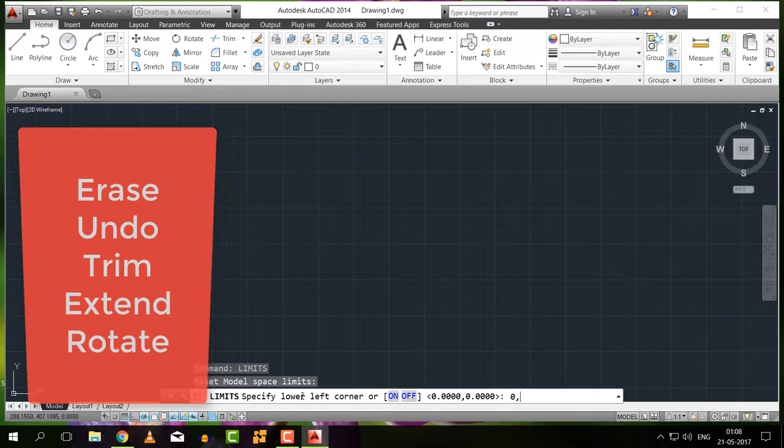Today we're going to see about erase, undo, trim, extend and rotate.

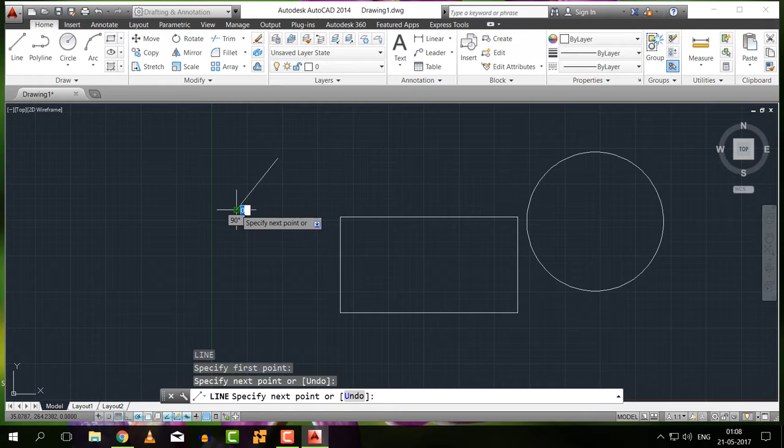For erase, the command is E, enter, select the object and enter. The object will be deleted. So it is very useful when you just draw multiple sets of diagrams and want to erase a particular type of diagram.

And U enter is undo. Just enter it, and it will undo your actions.

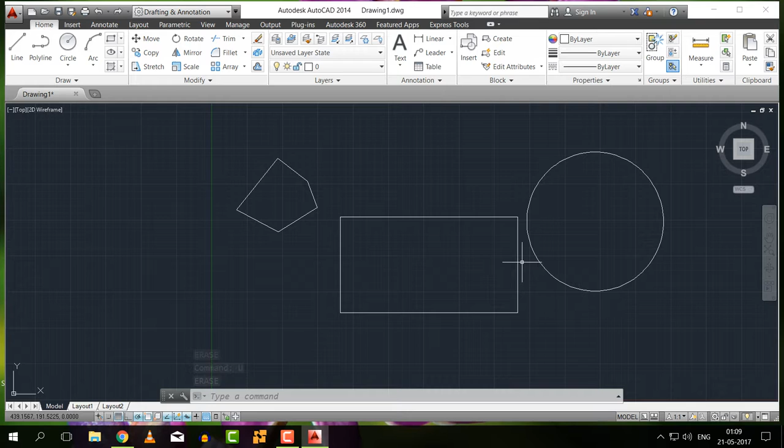Next we're going to see the trim options here. Trim is very essential in AutoCAD and a very useful command. Let me draw a layout for these trim options. This example will be perfect for all the trim options.

For trim, the command is TR, double enter. We have fence, crossing, project, edge, erase and undo. First we see about fence.

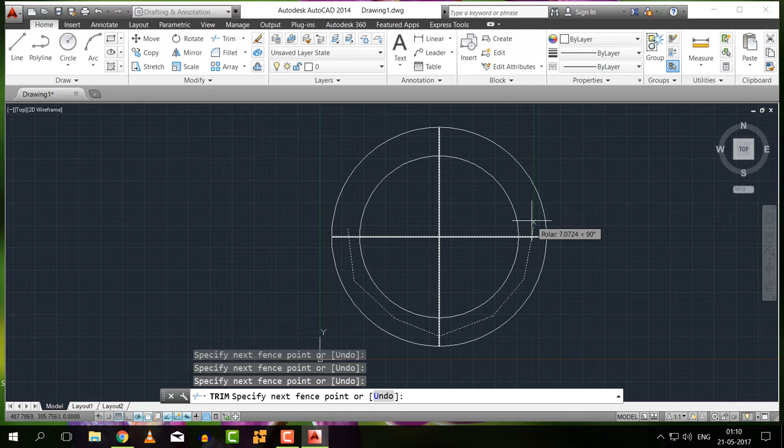Fence is nothing but a crossing of anything. If you just draw anything in a crossing manner with a closed or open loop, it will be trimmed.

Next is crossing, and if it has any edge, it will be trimmed. If we just use the trim command as TR double enter, it will normally be used as a crossing trim option only.

Next is project. Project is nothing but a trim option based on our views, and it is similar to crossing. It needs something opposite to each other, like a line.

For example, I'm drawing a small part of line and using project. We enter, then it asks UCS, view, or something else. UCS is nothing but the user coordinate system, which is the coordinate system I've set. Based on that, it will be trimmed.

You can trim this diagram anywhere because opposite we have lots of edges, so it will be easy.

Next option is edge. We have extend or no extend. First we see extend. Extend means it will be trimmed to the edge of the extended line.

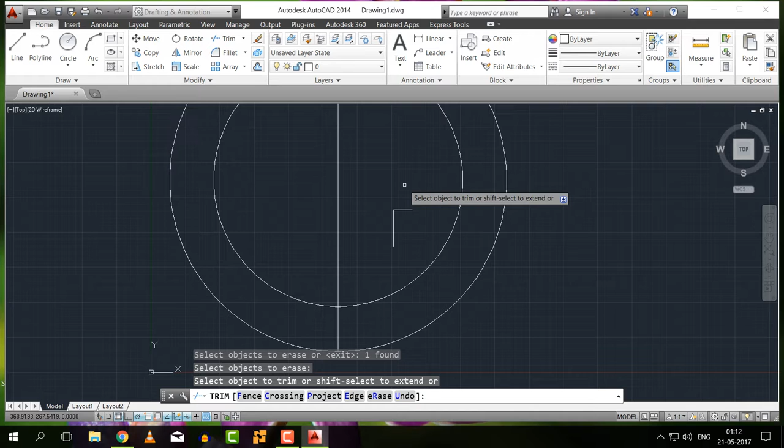So erase is normal erase as we saw before, and undo is normal undo as we saw before. E enter and U enter are the same, but vice versa it should work in the trim option.

Next we're going to see the extend command. For extend, the command is EX, double enter, and the options here are the same.

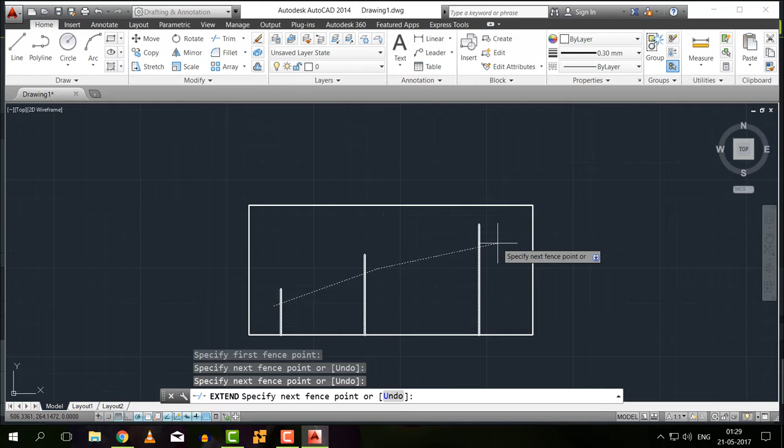Fence, just crossing a line, then click enter, it will close to the next line. Next is crossing - similar, if you use EX double enter, it will normally work as a crossing command. Just click the edge of the open loop, and it will become a closed loop.

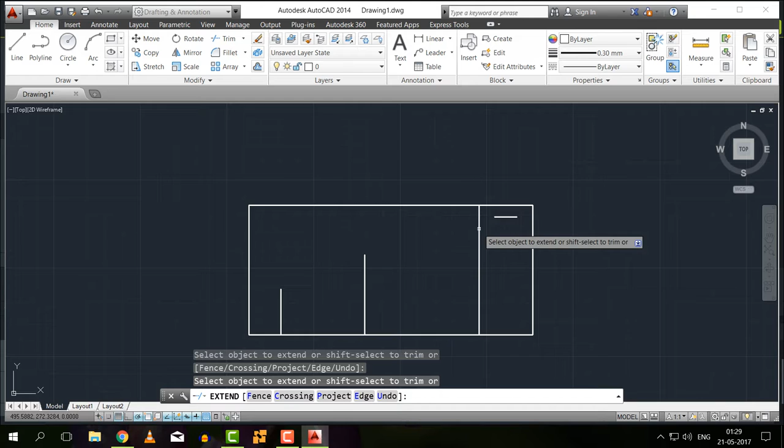Next we're going to see the edge option. It's also similar - we have extend and no extend options. Edge no extend means it will go fully up to the closed loop, while extend means it will only go up to the edge of the line.

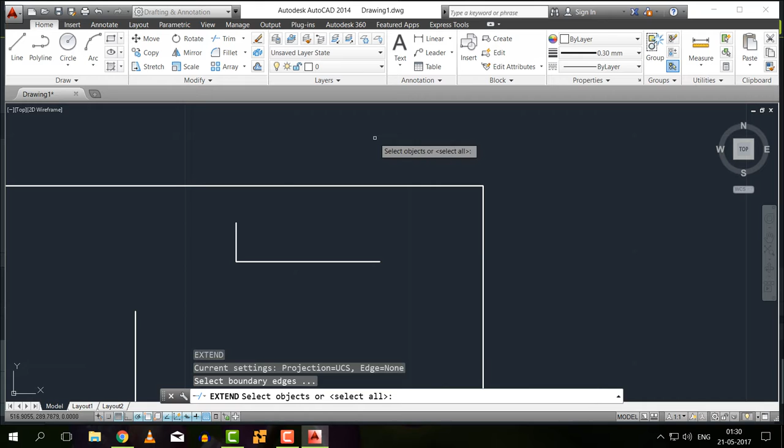You can see here right now it will extend to that particular line.

So next we're going to talk about the rotate option. It is a very essential AutoCAD command. This is a simple command and it will be very useful when you're drawing anything in AutoCAD.

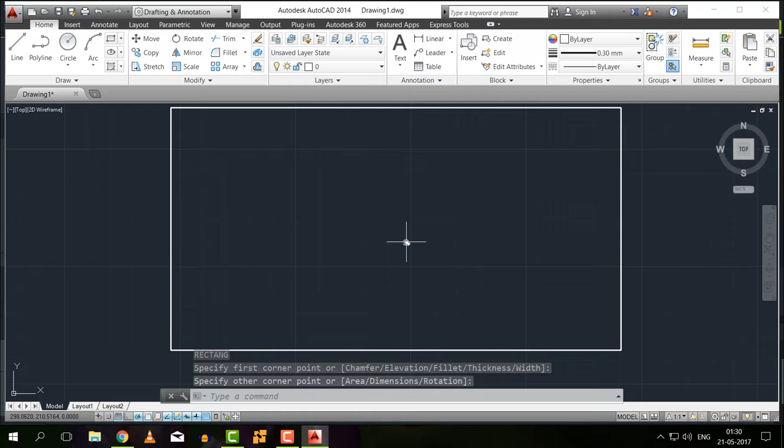For rotate, the command is RO, enter, and it will ask you to select the object, then it will ask you to specify the base point - any point based on which we're going to rotate.

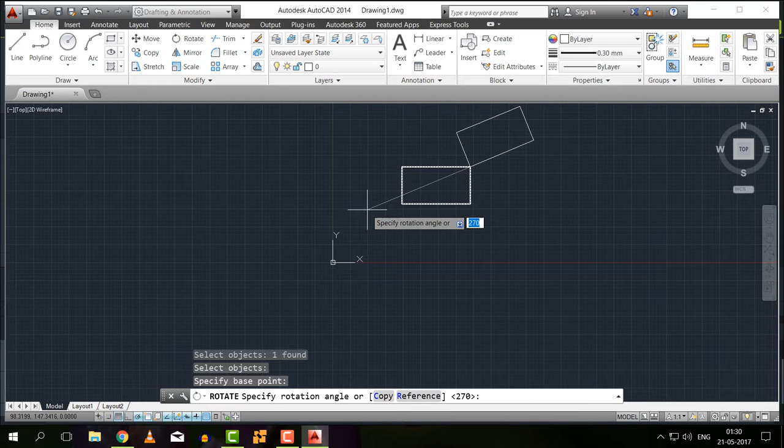After that we have an option like this - we can also enter the angle here. I'm just entering 80 here. It will be tilted to 80 degrees from the base point we selected.

One more time - just select, then base point. I'm dragging to the center of this and center of this, and we get the middle point here. Make sure you enable this option in the OSNAP draft settings.

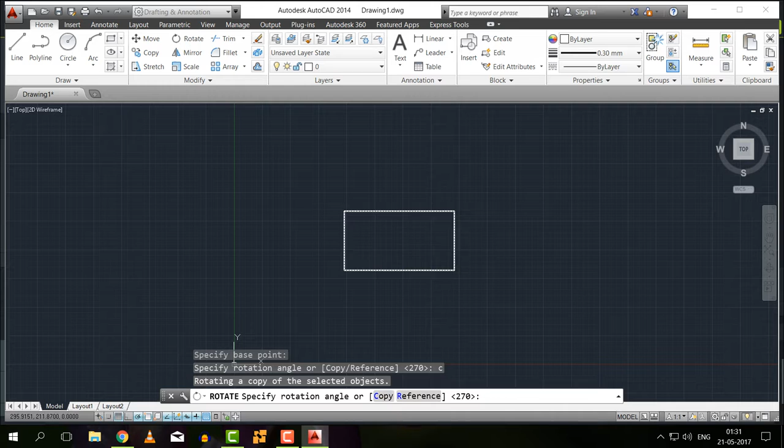One more time, just rotate - select the object, track a midpoint here, track a midpoint here. We get a midpoint here so that our rectangle is clear.

Now we use the copy option in rotate. C enter, it will be copied, and then click - it will be like this.

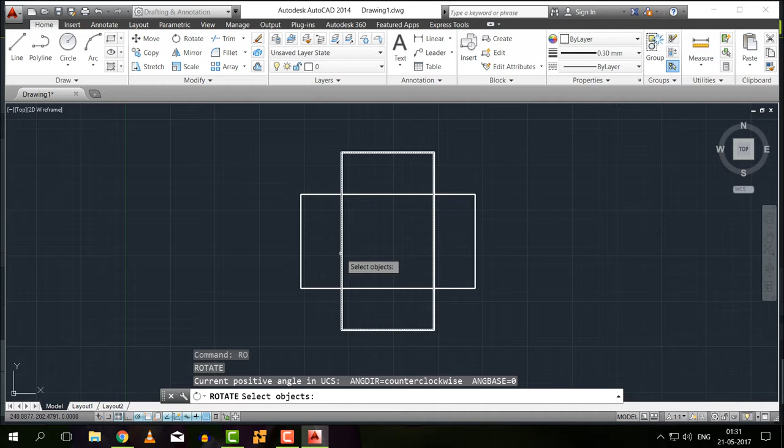We have one more option - it's the rotate as a reference command in rotate. Select the object, base point, then give R enter. Based on the reference angle or the two points we click, the object will be rotated like this.

It is also very useful while drawing elevated views.